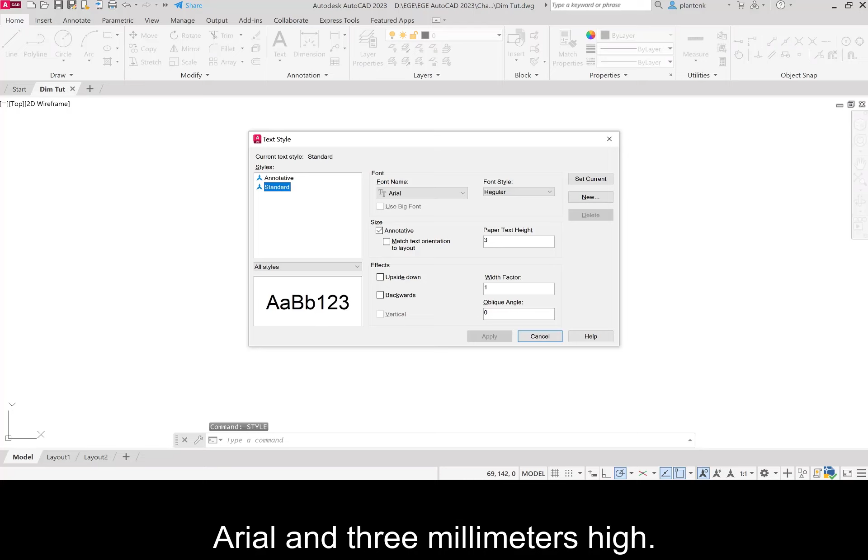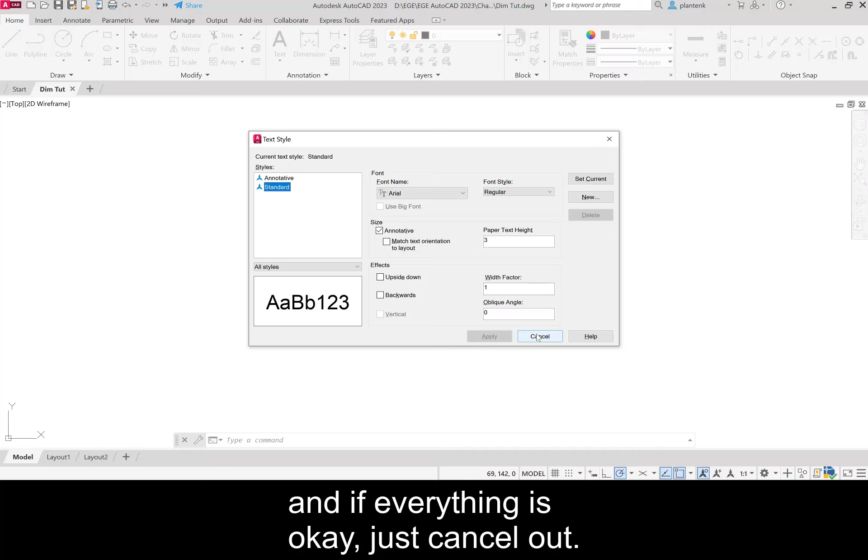Let's double check some of our settings. Let's make sure that our text style is correct, Arial, and 3 millimeters high. Double check that the text is annotative, and if everything is okay, just cancel out. If it's not, change it and apply.

And let's check our limits. Make sure that it's 297 and 210. Everything looks good there.

We're going to draw the figure that's in the book without dimensions. I'm just going to draw the figure and we're going to dimension it together. All right, so let's go ahead.

First, let me get my snap settings correct. I'll clear all and set just endpoint and intersection. I think that's all I need.

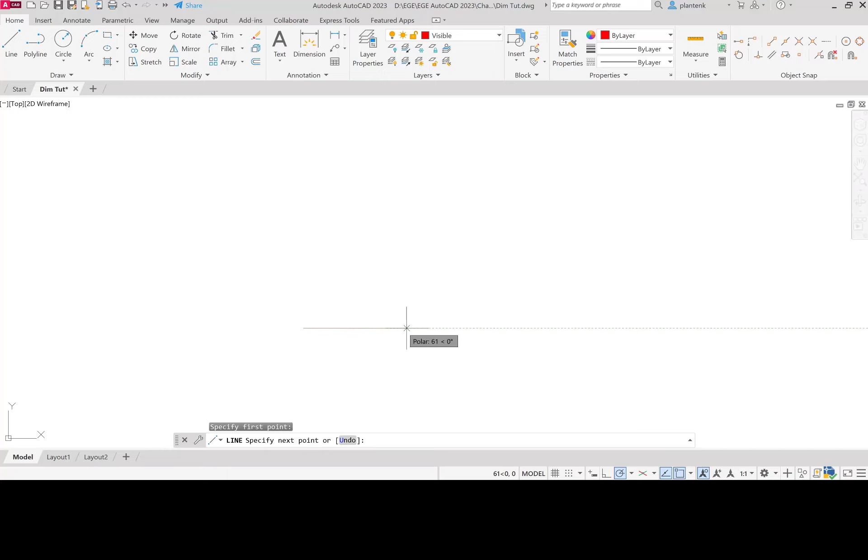And I'm going to draw in my visible layer. I'm going to go 40 in that direction.

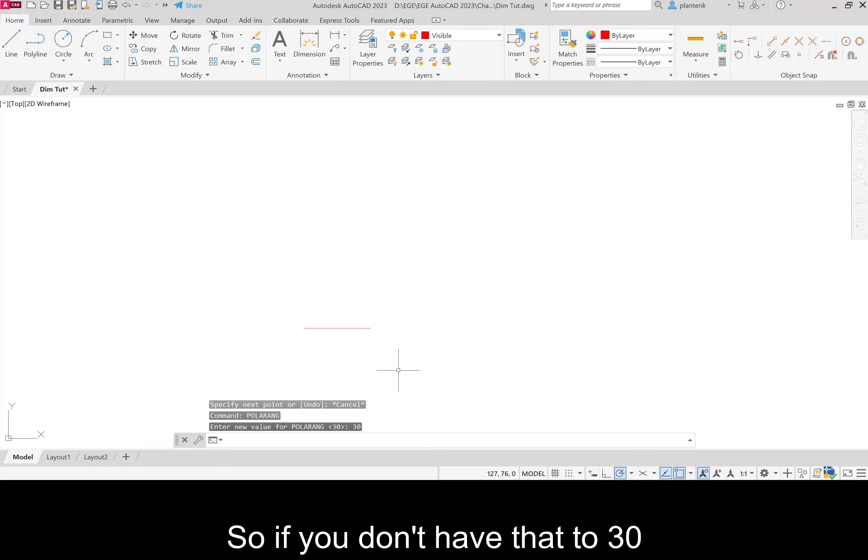If you don't have your POLARANG on, let's get out of this. POLARANG, let's set that to 30. So if you don't have that to 30, I'll go ahead and set that, and have your polar tracking on.

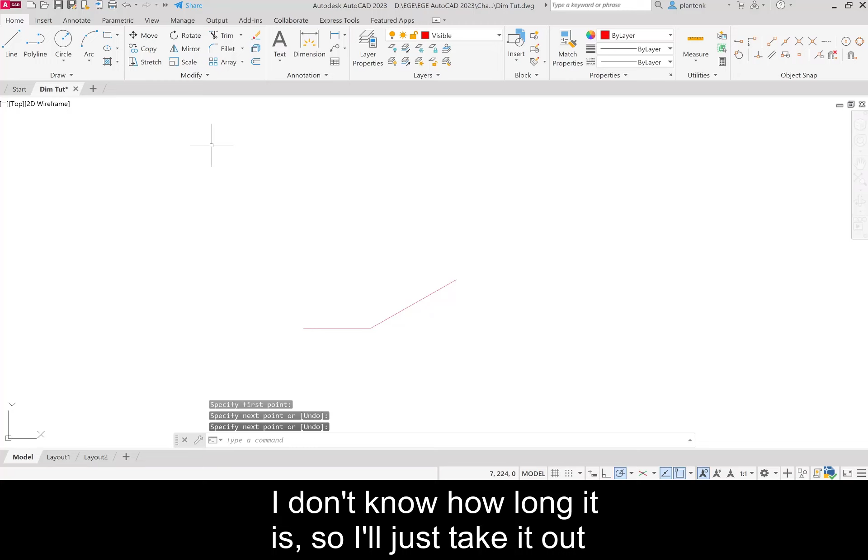I'm going to go back to a line, snap that to the endpoint, and on my 30-degree line, you can make your 30-degree angle. I don't know how long it is, so I'll just take it out, and I'll start over on the other end.

So I'll go up 30, over 5, up 10, and I'm going over the entire distance, which is 50.

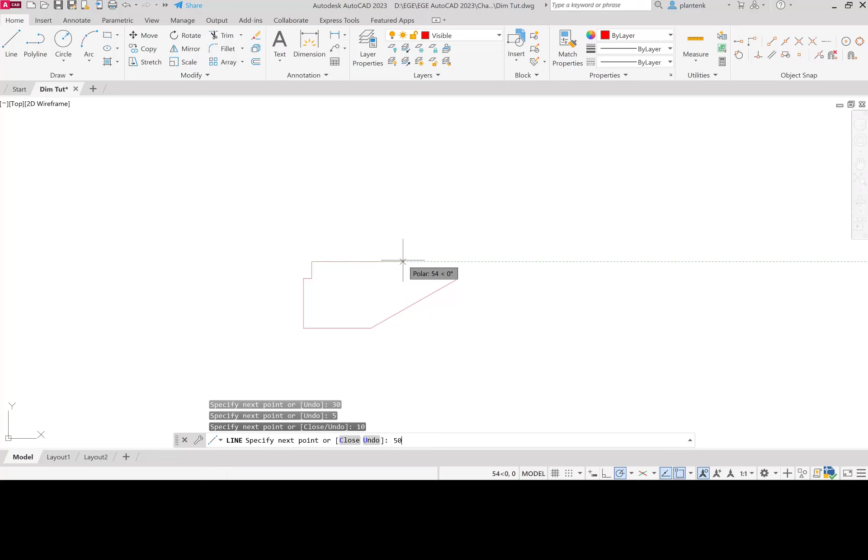And then just down. And I'll trim off what I don't need, that and that. And I'll do a fillet to create that radius, so the fillet is 20.

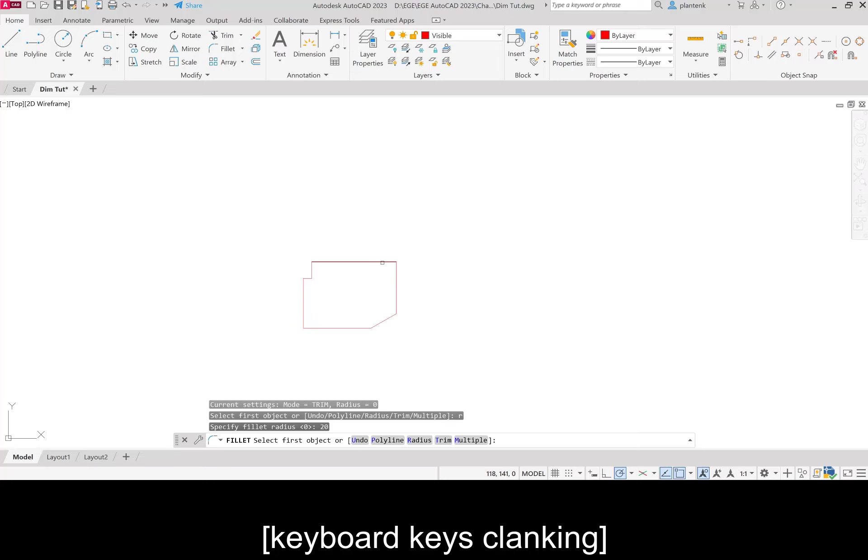And of course, this is not the only way you can draw this object. I'm just doing it to what comes to mind.

And I'm going to do a chamfer, so that's underneath the fillet. I'm going to do a chamfer distance 2 by 2, and chamfer kind of works just the way a fillet does.

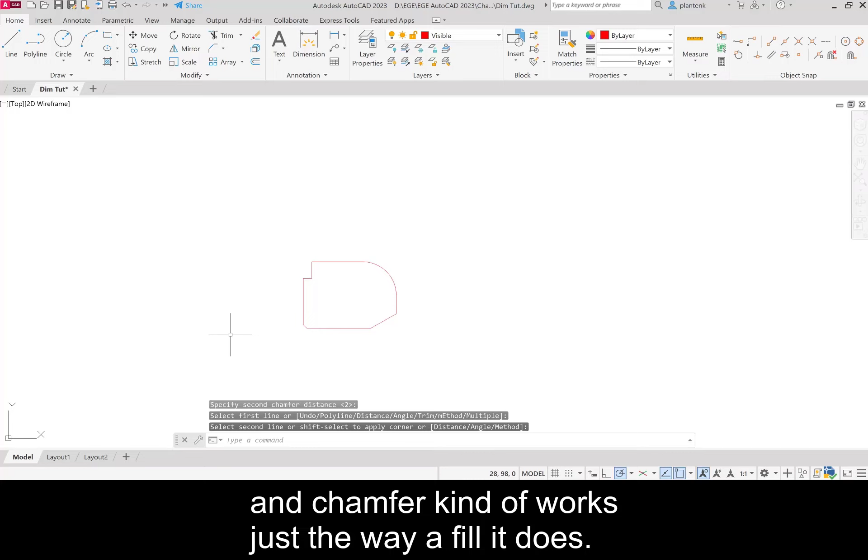Select those 2 lines. And then I will do a circle that will snap to the center, and make that a radius of 10. So that's the basic shape of the object.

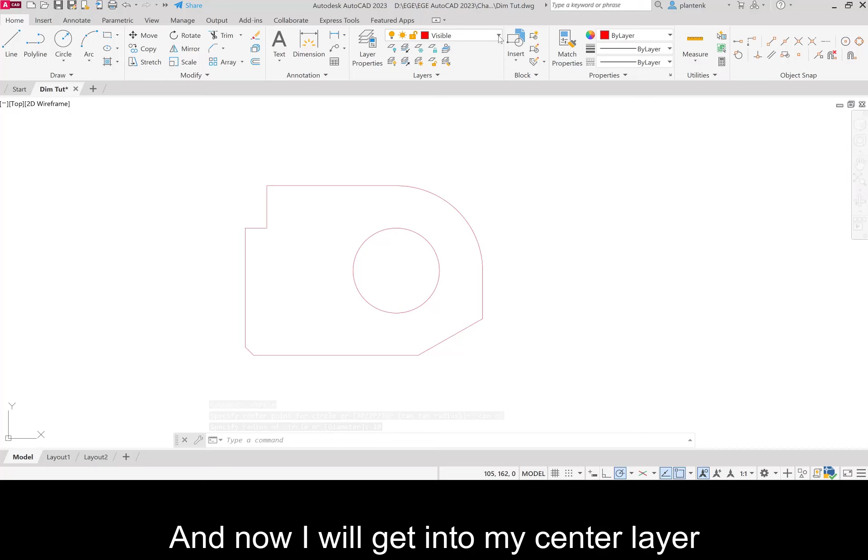Now I will get into my center layer and put a center mark here. And because the radius shares the same center as the circle, I'm going to extend a line from this out by 10. That just shows the reader of your drawing that they share the same center point.

All right, so we have the object, and we are ready to dimension it. So I want to get it zoomed enough, but not too much, so that we can see our dimensions.

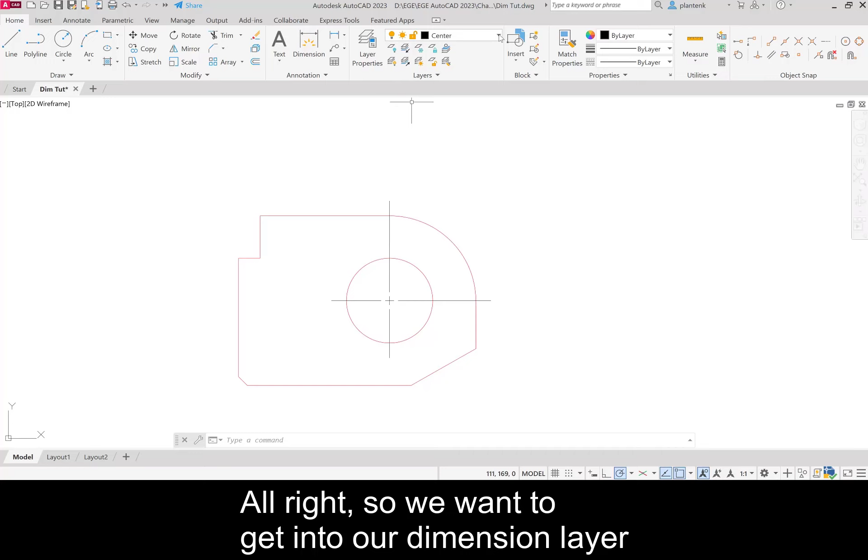All right, so we want to get into our dimension layer because that's where all our dimensions will be. And we're going to select the Annotate tab.

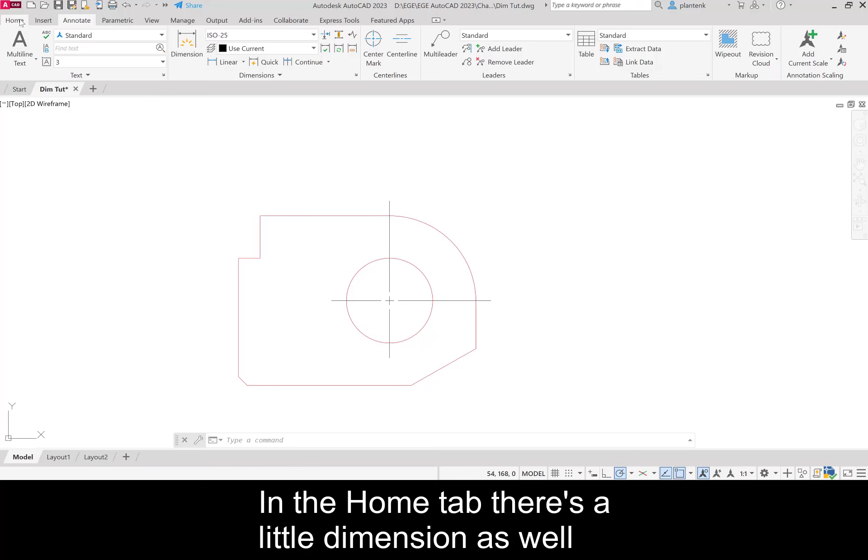In the Annotate tab, there's this dimension panel, which allows you to place any kind of dimension that you need. In the Home tab, there's a little dimension as well, but in the Annotate tab, there's a whole lot more. So if you just have quick dimensions to make, you can do that in the Home tab, but here you have a lot more options.

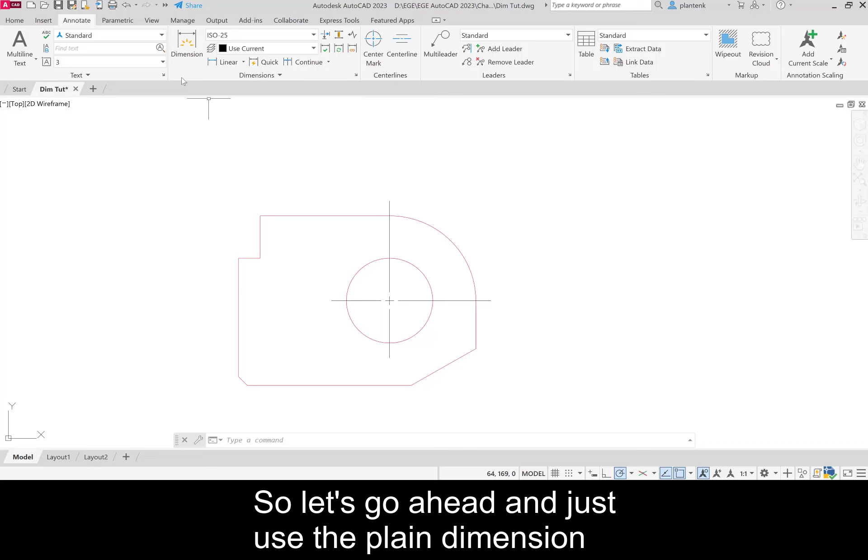All right, so let's go ahead and just use the plain dimension, or this pull down menu dimension. The difference is that the one that just says dimension, AutoCAD guesses what kind of dimension that you want, and the dimensions in the pull down, you specify what dimension you want.

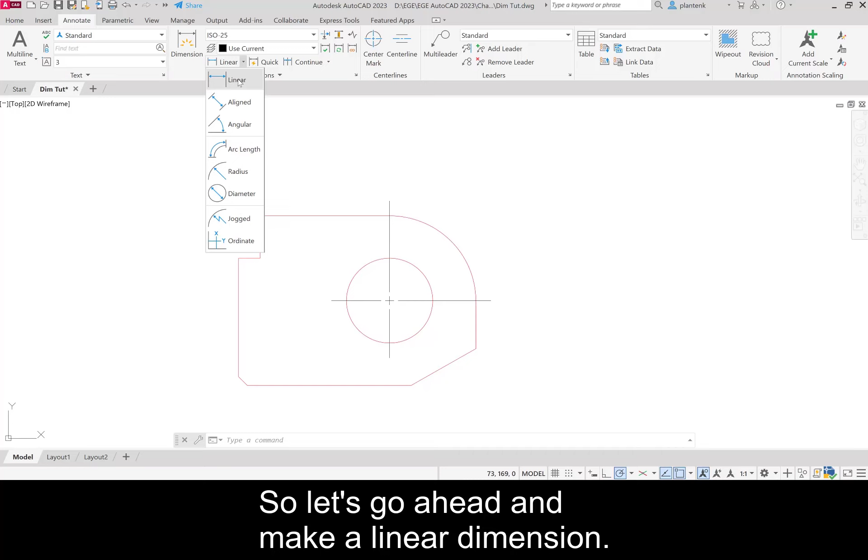So let's go ahead and make a linear dimension, and we're going to select point 1 in the book. If you're looking at the book, this is point 1 here, and point 2. And it's going to place a linear dimension. So we're just going to pull it out and click where we want to place it.

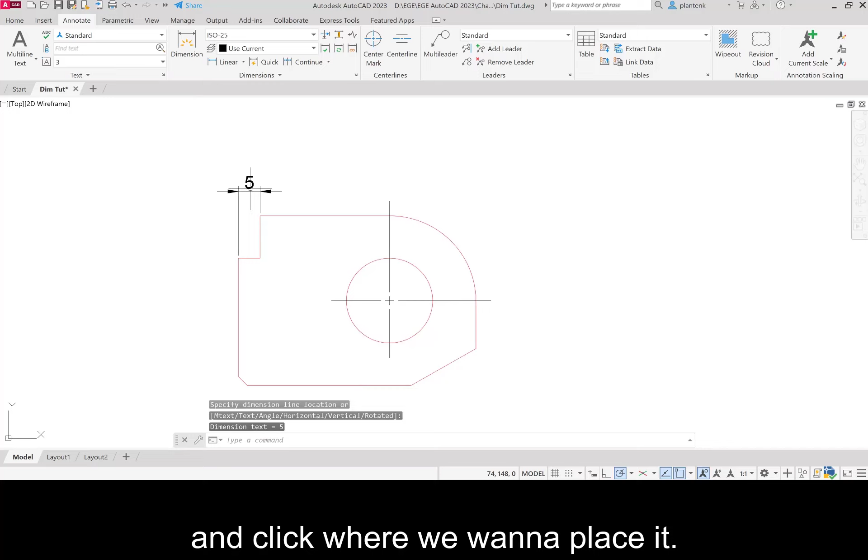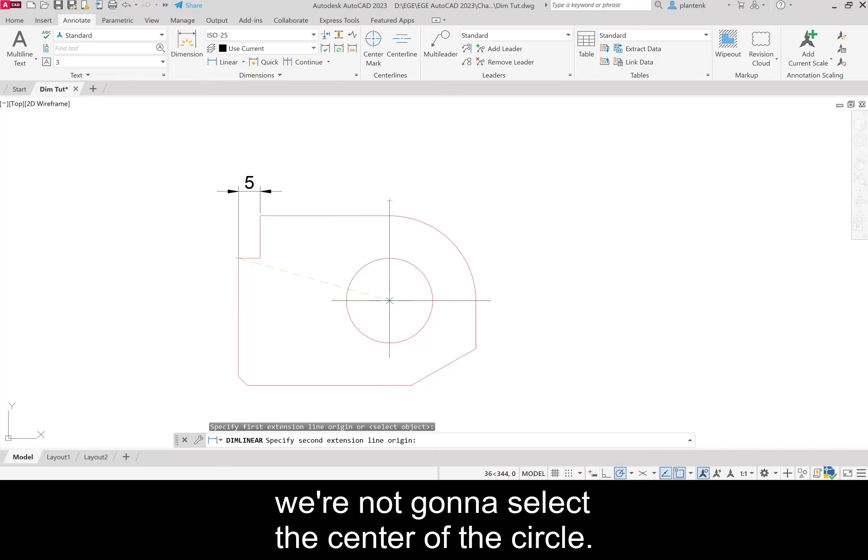We're going to add the other linear dimensions in a similar manner. So let's add the next one. When we're going to dimension to the center of a circle, we're not going to select the center of the circle. We're going to select the end of the center line. So we'll do that, another linear dimension.

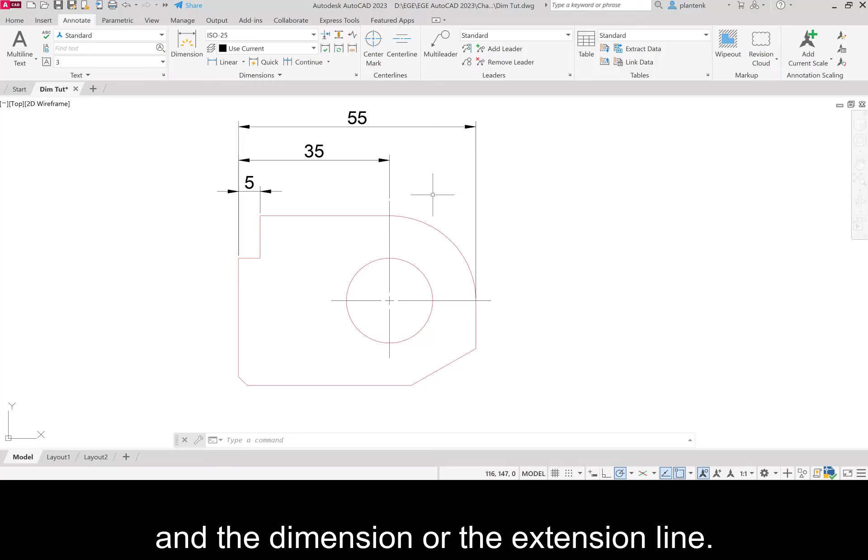We'll select that. So you can notice that AutoCAD is automatically placing a gap between the object and the dimension or the extension line. And that's good, right? We want a separation between the dimension and the extension line. So we'll place some more.

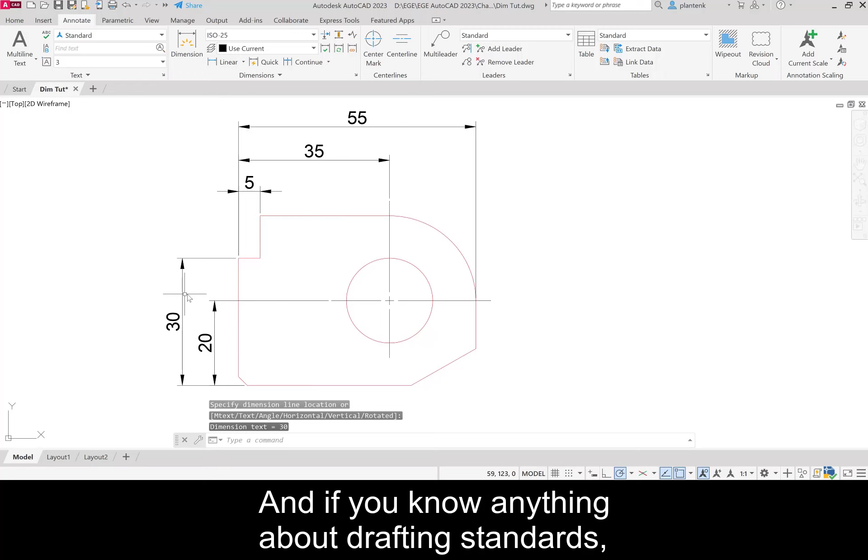And if you know anything about drafting standards, don't freak out. I know that what we're doing here is not completely correct as far as the way the dimensions are looking, and we're going to fix that, so don't worry.

Oh, I don't want to do that. We already did that one. I want to go from here to the angle.

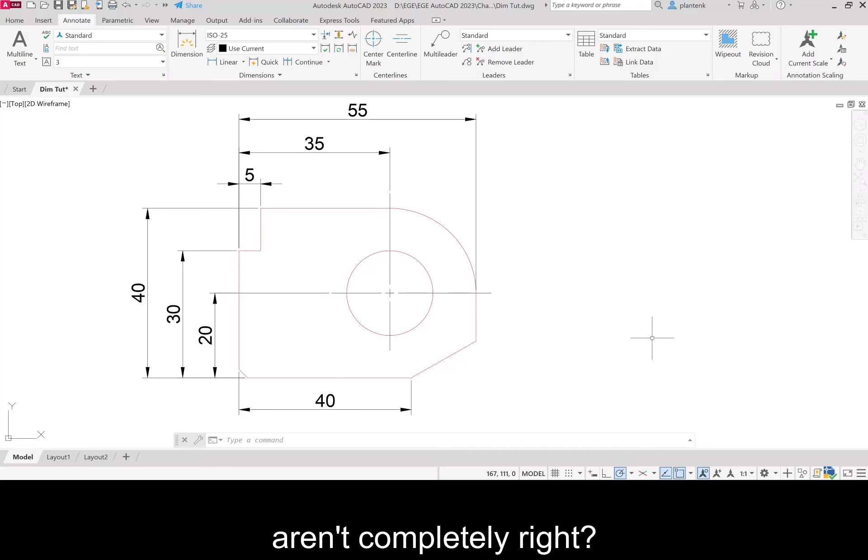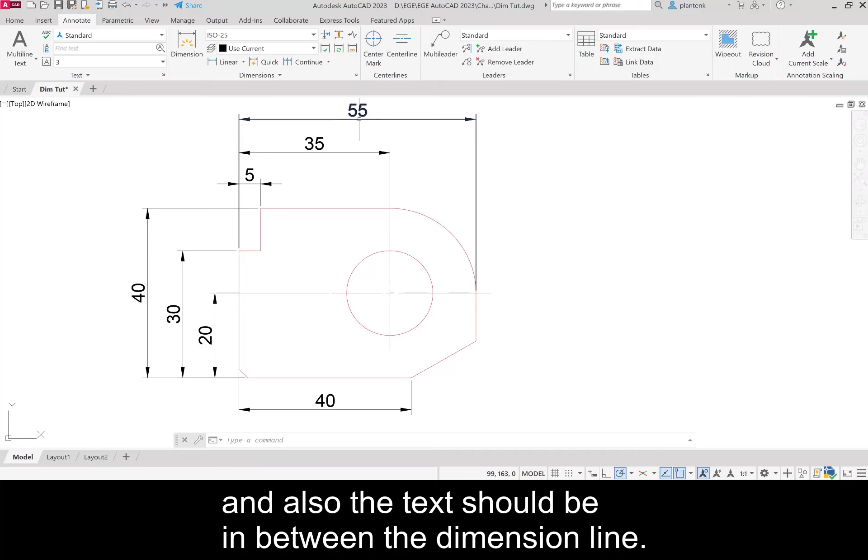All right, so what do I mean by the dimensions aren't completely right? Well, in the ASME style, all the text should be horizontal. It should be able to be read if a person is looking at the drawing from one direction. So all the text needs to be horizontal, and this, obviously, the text is not. And also the text should be in between the dimension line, so it shouldn't be on top of the dimension line. So those are a couple of things that we need to fix.

And we can do that. We can tell AutoCAD, no, this is not the style of dimensions that we want. We want a different style, and we can specify what that is.

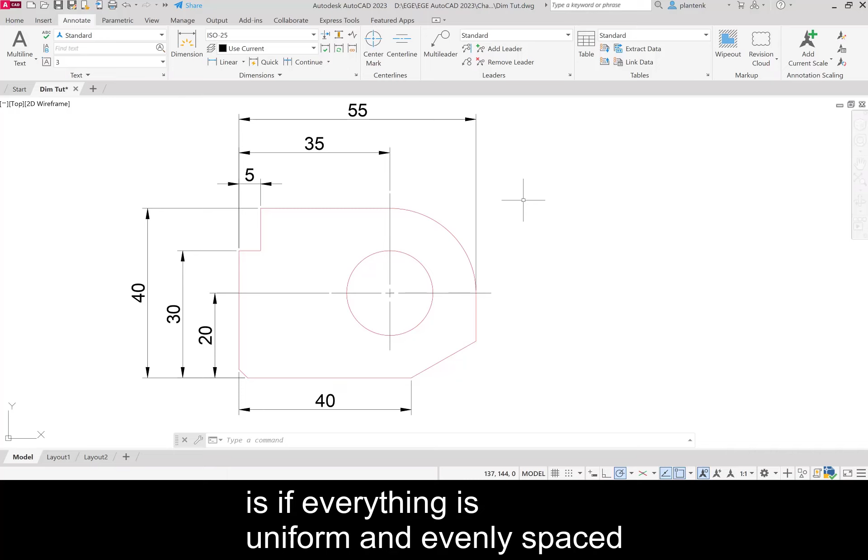All right, so before we do that, we're going to space our dimensions evenly. One thing that makes a drawing easier to read is if everything is uniform and evenly spaced. And AutoCAD allows us to do that quite easily.

And we're going to use this command right here, adjust space. So we're going to click on that. And we're going to select this 5mm dimension as our base or as our first dimension.

Then we're going to select the 35 and the 55, and then we're going to hit enter and hit A for auto. We're going to see what it does.

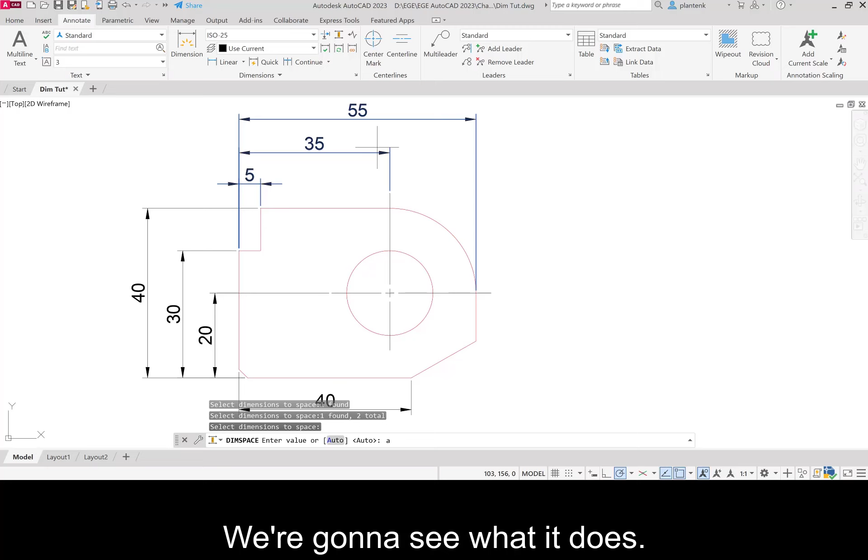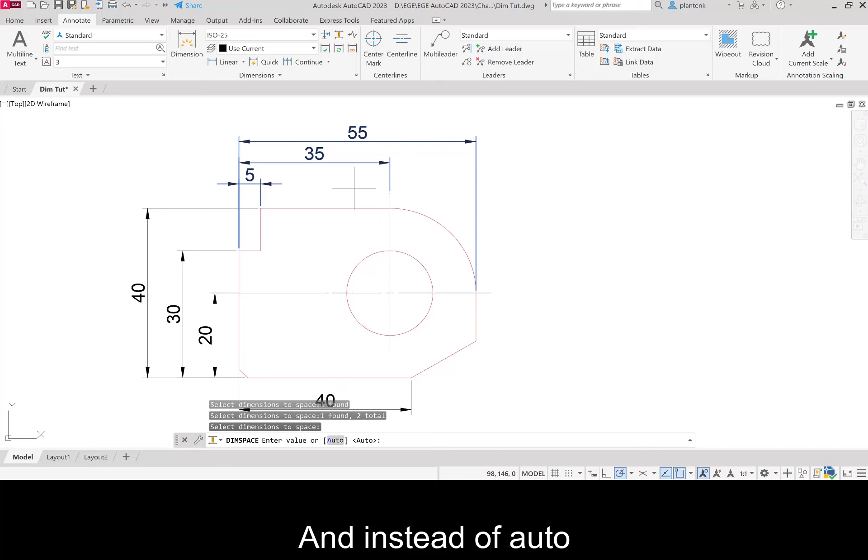So you notice that the auto space in AutoCAD puts them a little too close. So let's do that again. So we're going to do the 5, 35, and 55 and hit enter, and instead of auto, let's enter a value of 8 millimeters.

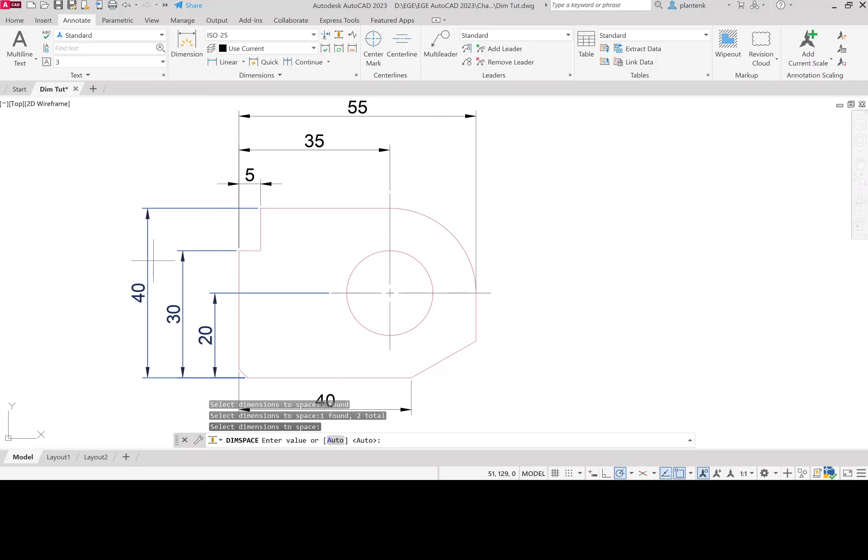So that looks better, right? So now all the dimensions are spaced equally by 8 millimeters. So let's do the same for the vertical dimensions. And there we go, so it's really easy to space your dimensions equally.

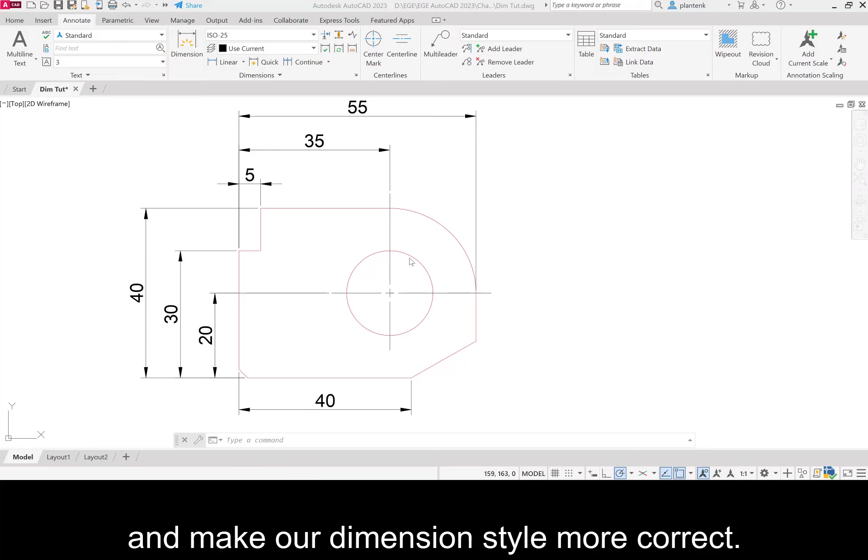All right, so in the next video, we will put the diameter, the radius, the angle dimension, chamfer, all the rest of the dimensions, and make our dimension style more correct.